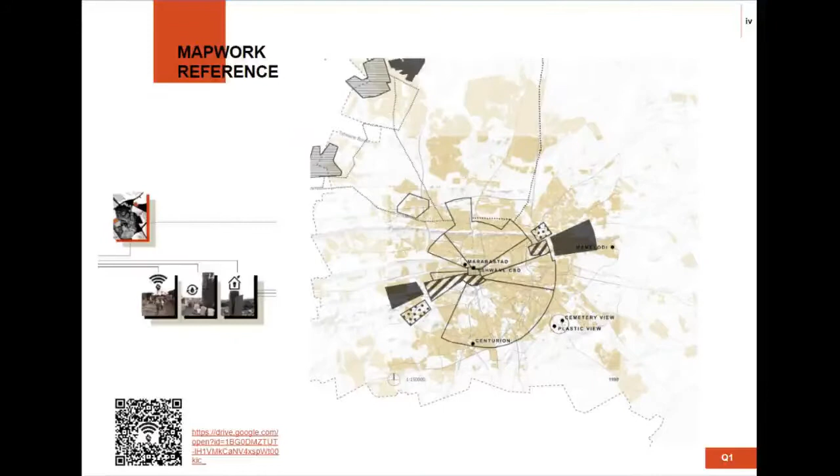Herewith a few slides to refresh your memory on the references to Q1 research, as well as the larger group structure and smaller group splits that took place over time. As indicated, Martine and myself continued to work together throughout the entirety of this project.

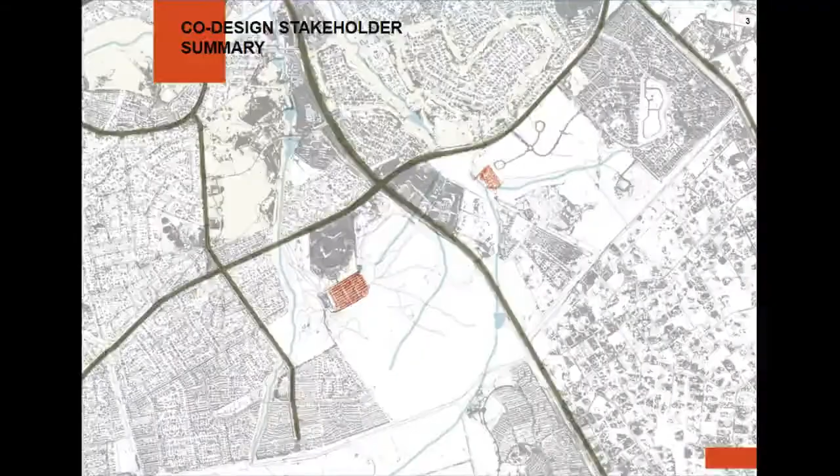The ethos of the Urban Citizen Studio follows the notion of socially engaged architecture regarding methods of design generation that uphold the partnership between architect expert and user expert. Communities are to be placed at the forefront of a co-design process in order to critically engage in socio-spatial architectural design. Here were the various stakeholders that were established in the co-design process, with special mention of our primary stakeholders.

in red, due to their involvement and relation to our group's research direction. Please familiarize yourself with the referencing style outlined in this slide, as we will reference the inputs from stakeholders in this way.

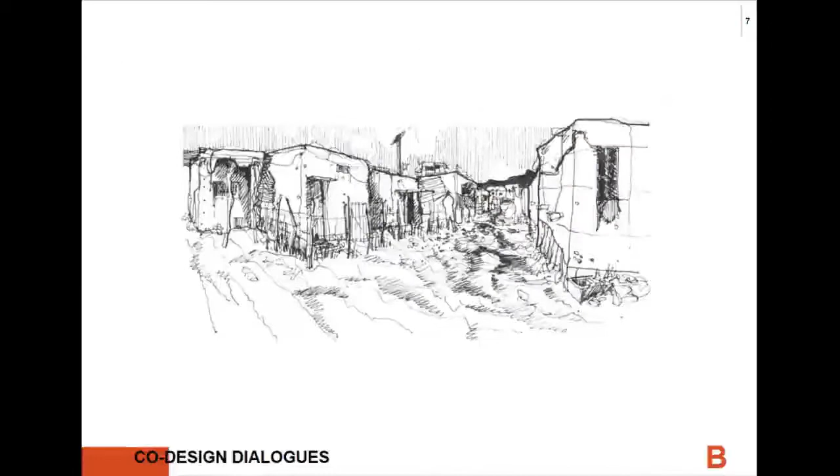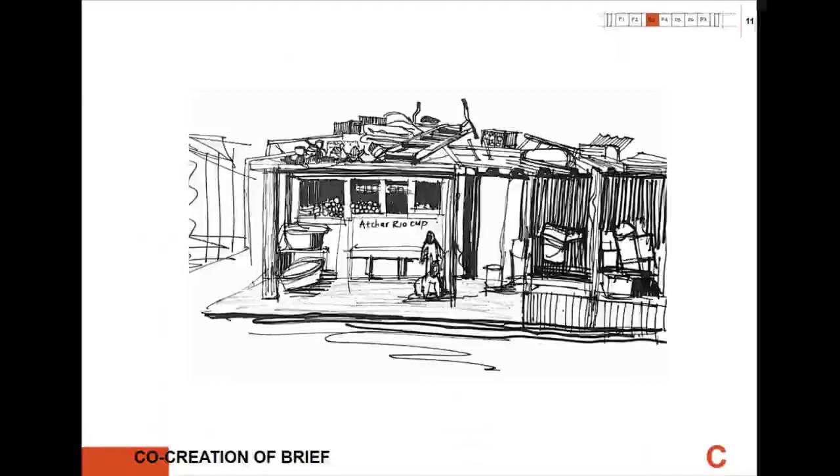To analyze or read architecture through the lens and belief of a sole author imposes preconceived limits on the agency of interventions and the contributions of numerous actors in the process of spatial production. As stated before, the theory of co-authorship was applied at the inception of the project by involving stakeholders into the co-design of the brief. Key principles were then confirmed by stakeholders and noted in red.

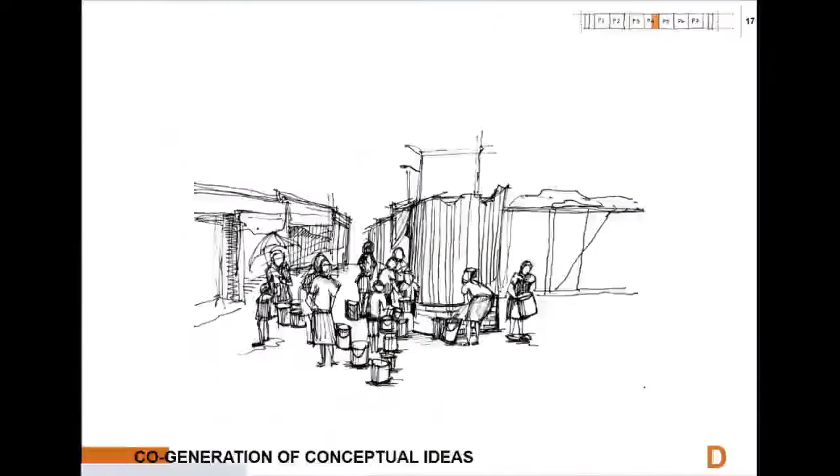Week 4 and 5 hosted multiple stakeholder engagements around the initial co-generation and co-evaluation of conceptual ideas. Multiple inputs and discussions over these 2 weeks accumulated into a design approach that considers community and people as the primary source of energy, and perhaps force for change in these settlements.

The initial design concepts considered by us in the early stages both revealed an underlying inclination towards networks and intangible assets. In order to conduct effective stakeholder engagements, we joined forces and trusted the co-design process to guide us further.

The notion of people as assets are highlighted in the following 3 theoretical considerations: the well-being economy, social capital, and spatial agency. Investing in social capital and working towards the recognition of the informal sector has the potential to steer these communities to greater well-being and self-sufficiency.

An emphasis is placed on the idea of uniting people with various knowledge and skill sets in order to thrive beyond the limitations of their urban location and the strict vertical economy, as stressed by Prof. Ferramonti.

Jeremy Till and Nishat Awan suggest that to design spatially means to encompass the wider sense of space: physical, social, metaphorical, and phenomenological aspects, and by this regard, one could even include non-spatial space. By using platforms of community engagement, the concept remained fluid enough to consider and absorb possibilities of non-spatial operations.

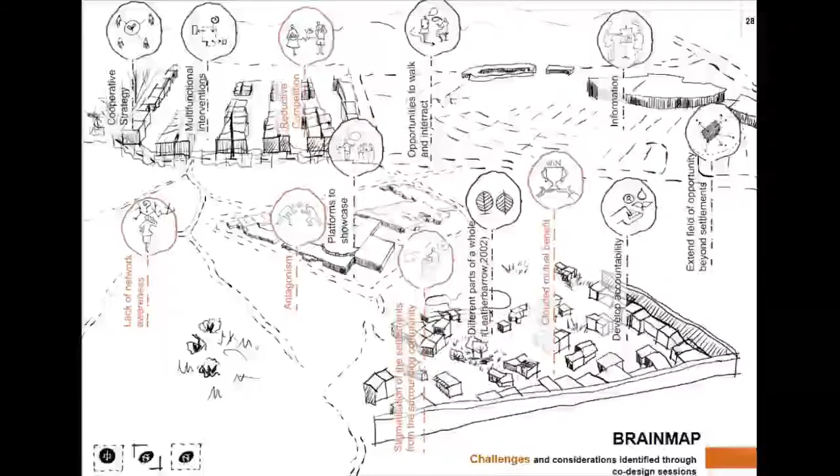Before developing ways of fostering engagement or conversation, it required us to understand the current challenges within the Moreleta Park neighborhood with references to social capital. Additionally, the highlighted challenges from stakeholders were considered.

At this point, it became relevant to find a way to render the concept of social capital interventions applicable and more tangible to the context of Plastic View. Guided by the proposal of Dragos Daskalou, we developed an intervention strategy that would manage a sensitive and effective approach in our architectural design.

Presented here is our 4-step strategy set out to build social capital and foster trust and cooperation: building reputation, intervening in the everyday, small incremental efforts, and future prospect space. This will be explained further in the slides to follow.

Building reputation entails the transformation of perspectives, how the village residents view themselves and how others come to view them. It addresses the idea that to foster trust and integration in the neighborhood, the stigma around the informal settlements needs to change. Human voices and stories from the people of the settlement are important to share and are envisioned to take form in a campaign of some sort.

Intervening in the everyday, being perceptive of the places that people already occupy and use, can help foster buy-in and cooperation from a community. With stakeholders' input, we identified a few potential areas in the vicinity of Plastic View to serve as emergent places for engagement or meeting.

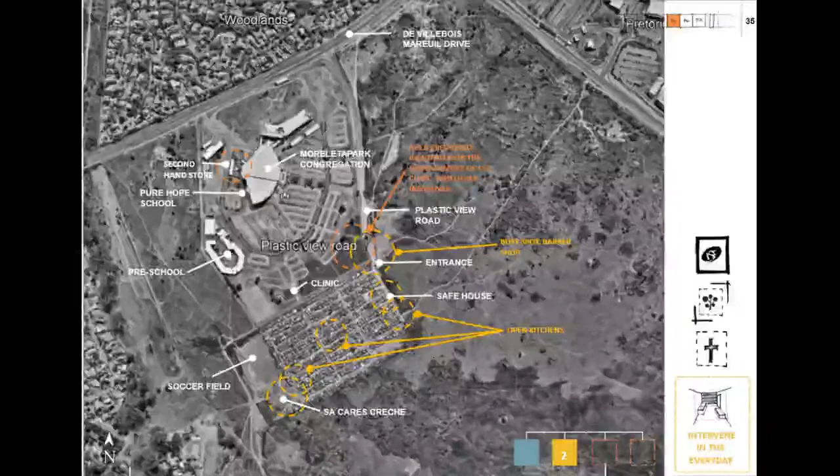The entrance area, SPAZA shops, and other areas identified were then further analyzed in terms of their activities, deducing ways in which community members interact and gather.

Small incremental efforts are interventions that in simple ways start to build self-determination and reduce the social distance between networks and individuals. Incremental efforts provide interim rewards and accomplishment for users in small moments of skills gained, exposure, union, or emotional well-being.

Precedent studies derived from earlier engagements and desktop studies were discussed with stakeholders and internalized with key principles informing our direction set out below. The experimental value of these precedents were considered pivotal in the way they prepare communities for greater goals.

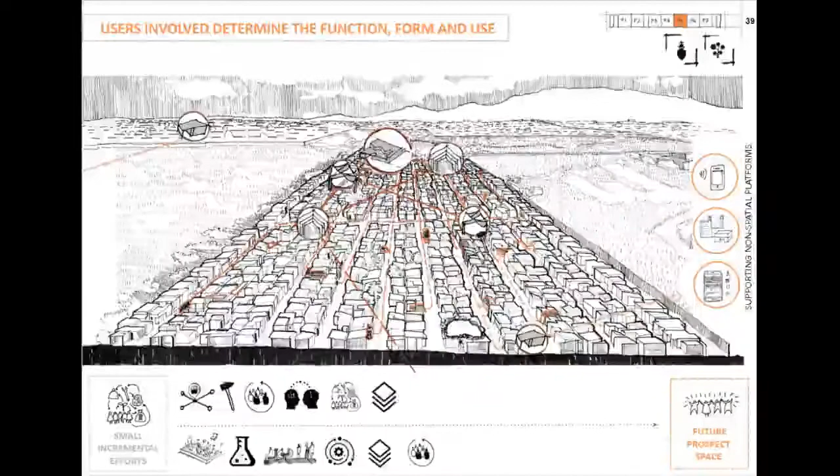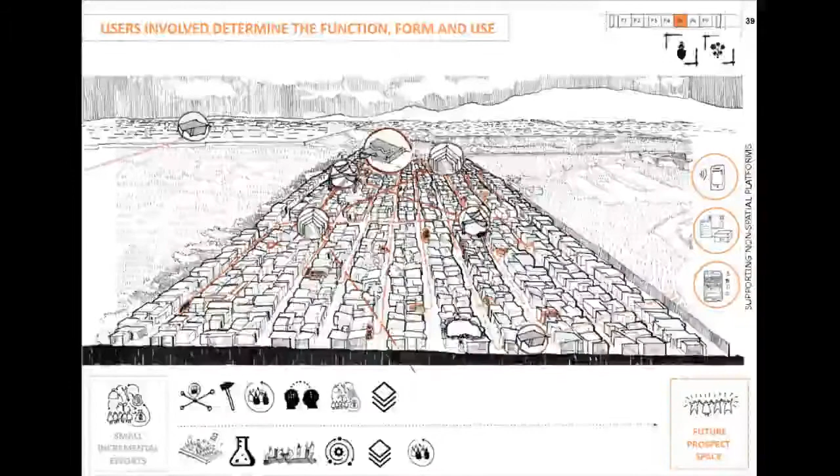Many of the analyzed precedents revealed progression into architectonic spaces or bigger projects over time. Similarly, the future prospect space refers to what the incremental efforts can become. Physical and non-physical small incremental efforts stimulate the multifunctionality of a building or space by bringing several ideas, individuals, activities into a coexistence.

Users are tasked to negotiate and reach an understanding based on trust, resulting in a bonded group of people that can pioneer and grow a project in complexity.

The involved users will end up determining the ultimate function, form, or use of their communal future prospect space, as well as the development, if needed, of supporting communication and electronic resources or platforms.

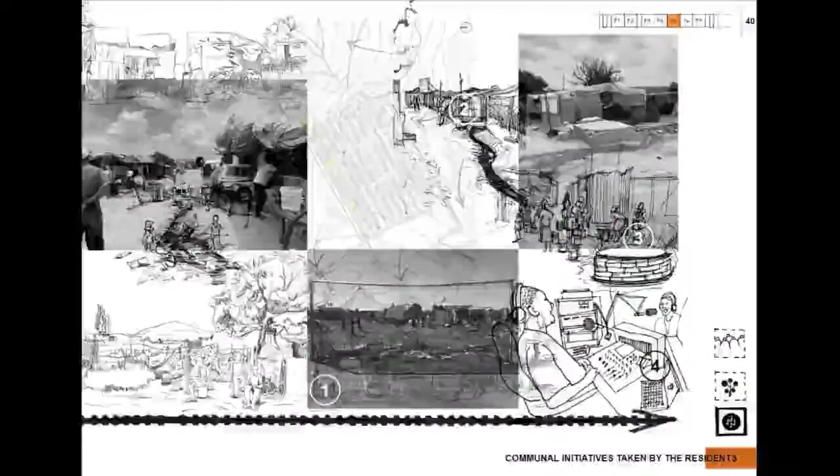This type of coming together for mutual gain has been previously exemplified in Plastic View. As a community, they independently funded and constructed water stands and two long drainage channels in the settlement.

The men frequently organized soccer league matches, and recently, during the pandemic, the settlement raised money to support a local radio station as thanks for the station's continual concern for the villagers.

With the basic framework set out, we furthered our investigation into the step of small incremental efforts, asking how small interventions can have agency in mobilizing self-determination, fostering community connections, and providing beneficial opportunities and advances in this context.

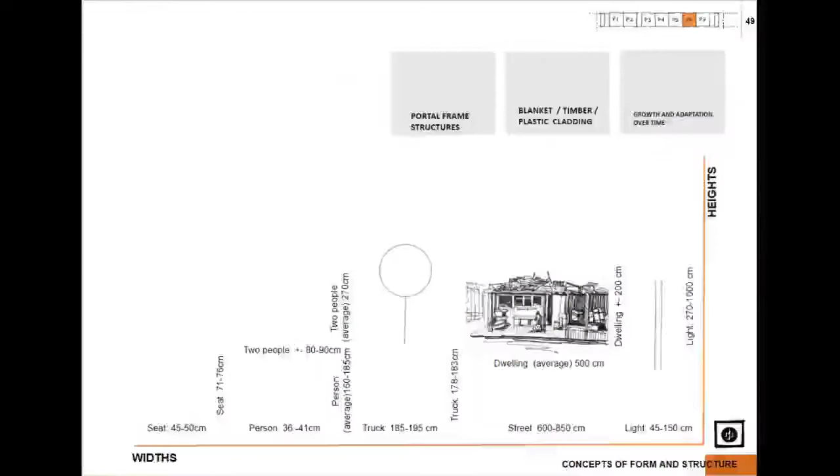An understanding of the form and structures realized within the settlement informed ideas of movability, placement, and modularity of our interventions. These considerations were further substantiated by ideas of the circular economy.

Building on the precedents and these site findings, we propose that an incremental intervention can be as simple as a chair or a table or a piece of fabric hooked onto wire.

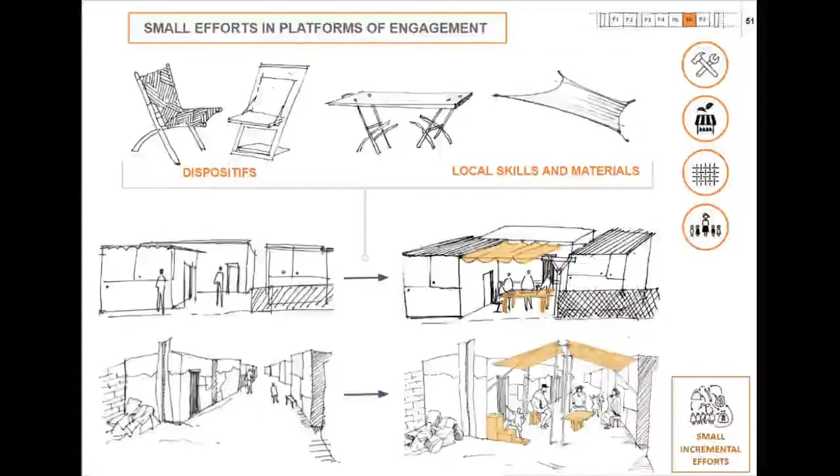Made with local expressions of skills and materials, these objects are able to transform and articulate everyday spaces into places of engagement, prompting spatial and social reactions and facilitating exchange and the building of networks.

Herewith, a few conceptual explorations conducted into how locally crafted dispositives can transform the everyday and foster community engagement in Plastic View.

Discussions in week 7 led to the renewed review of the SPAZA shop network and educational initiatives in the settlements as they pertain to our ongoing investigation.

We came to test the relevance of architecture as dispositive with graphical activities and questions completed by stakeholders and 2 residents of the settlements through a workshop by proxy arrangement.

The activities allowed for the community itself to surface the most applicable dispositives and indicate the preferred atmospheres for places of everyday engagement. The concluding statements were considered towards the final outcomes.

To test our assumption on this dispositive, a final stakeholder engagement led to a small-scale scenario on Wednesday from 12 to 5 when chairs were randomly placed in front of a SPAZA shop.

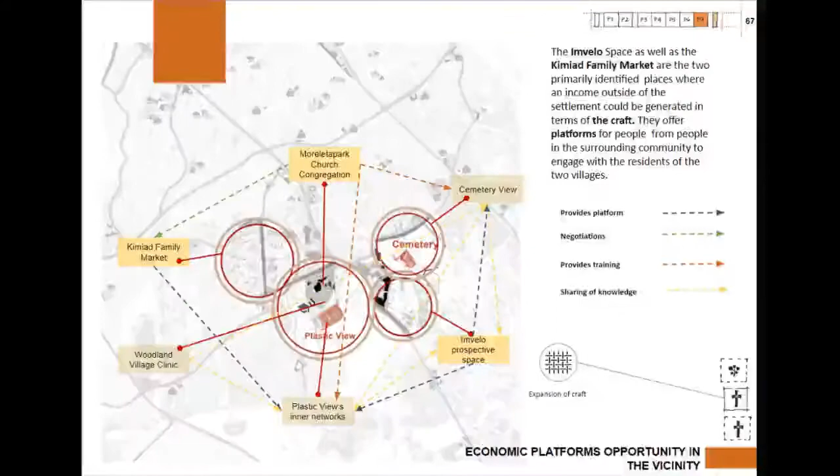Synthesizing the information and exploration to this point led to the emergence of two proposals as focus areas for incremental efforts and places of engagement, namely the decision-making space and the SPAZA workshop.

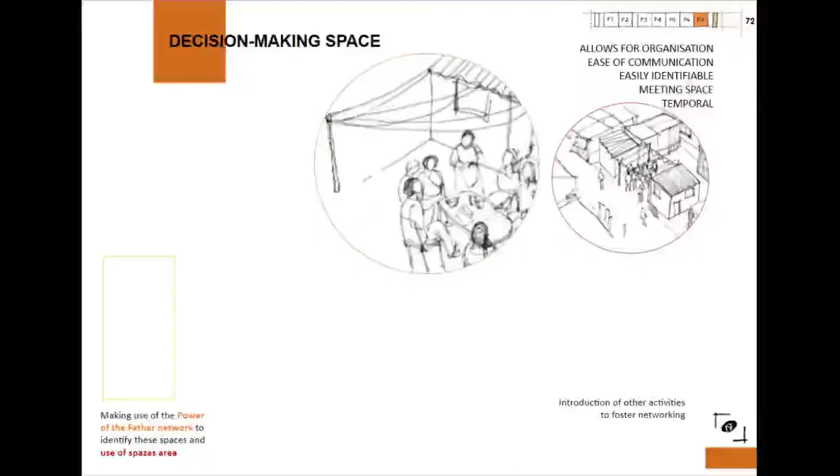The decision-making space surfaced from the idea of articulating areas to provide more platforms for fellowship, education, or rest in the settlement. It is an everyday space that, with the presence of dispositives, table or canopy, allows people to gather and start to converse.

Deceivingly unremarkable, these spaces can in fact instigate and facilitate important decision-making or networking between different individuals in the settlement. As an initial suggestion, these spaces can be linked in proximity to the residence of members of the Power of the Father structure or SPAZA shops.

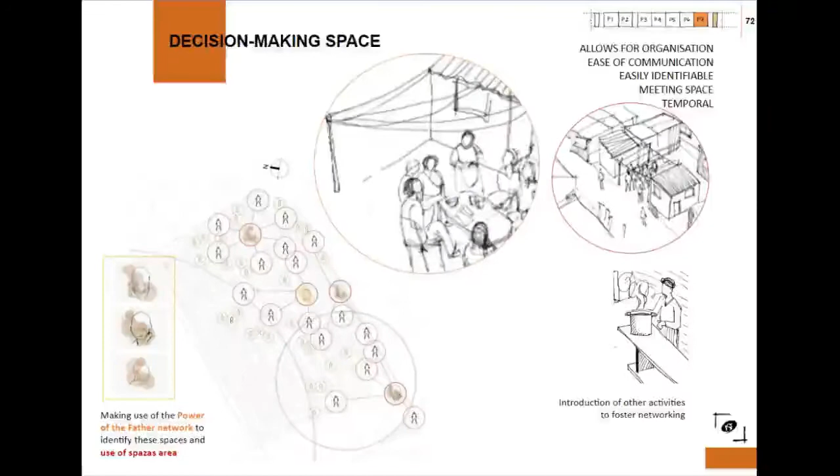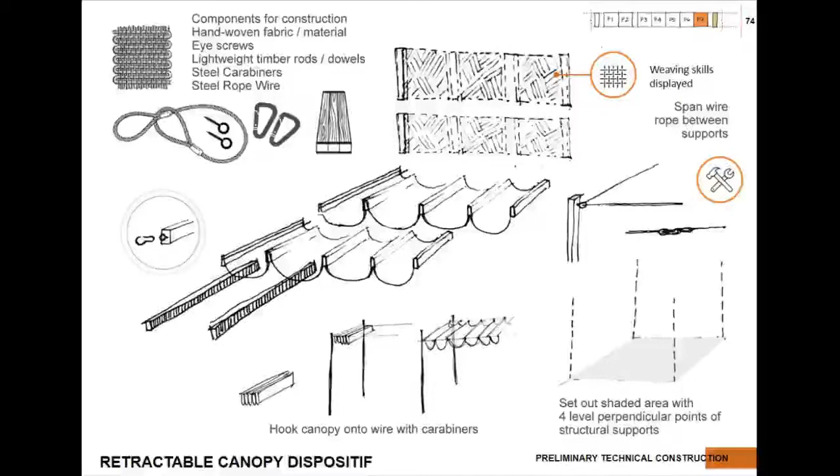The canopy's role as a shading device and a location indicator makes it highly useful for makeshift gatherings and workable spaces. The following preliminary technical construction engages with the local skills, crafts networks, and low-cost fixings known to the community. The idea is for the design of these elements to be adapted by crafters and users as sees fit.

The SPAZA workshop as our second proposal presents further opportunities for network awareness and mutual benefits realization. The activities of two networks, SPAZA shops and weaving ladies, along with an educational pseudocurrency system for children, as investigated by a fellow Group B member, could achieve a small circular economic loop of various benefits.

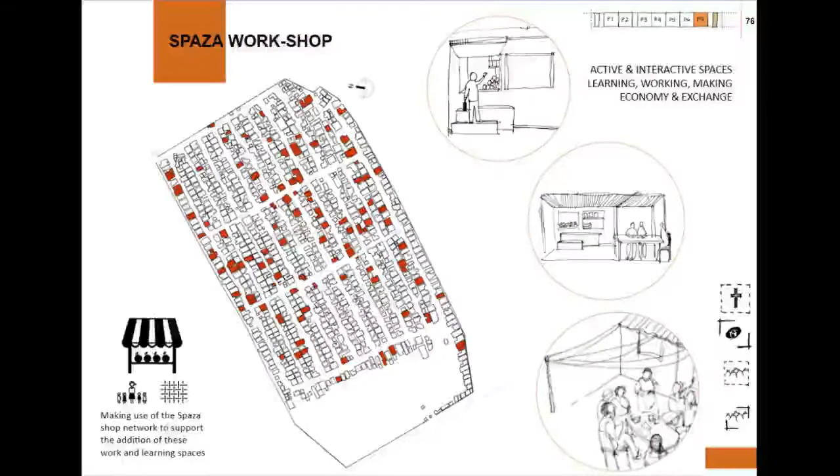Other networks can start to collaborate with them too, such as Invelo. SPAZA shops already are sources of attraction to adults and children, but it could have the potential to become combined learning, working, eating, buying, and socializing spaces.

This is especially informed through scenarios as seen in page 78, where devices used for work can double as play elements. For these several proposed activities to coexist, users must start to negotiate and come to an understanding based on trust and cooperation within a shared space.

This multifunctionality could then be reflected into a bigger space or more instances if needed.

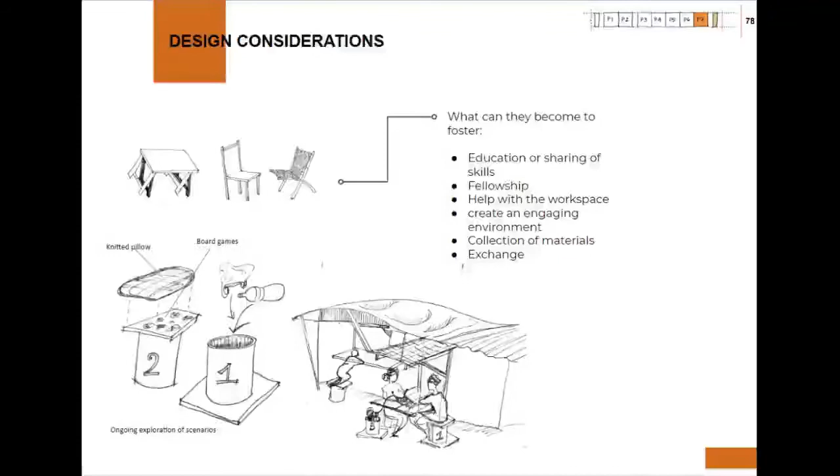According to Lee, creative design thinking is achieved by facilitating the mixing of the abstract, such as networks from an architect's perspective, and the concrete realms, such as the everyday spaces and dispositif.

Furthermore, incorporating the notion of knowledge sharing, which entails that spatial agents should understand knowledge as space production, thus also suggesting epistemic emergence, where space in all its forms should benefit from the realm of users' input.

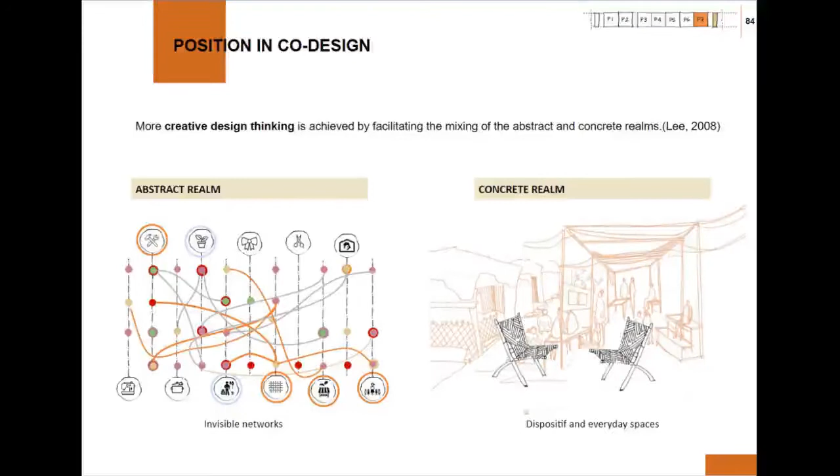In our deliverable, emergence is ensured through the versatility of the strategy and the potential options that could surface from it, ultimately allowing the residents to choose the best options and create something greater.

Still somewhat entangled between the strategic, intangible, and physical accounts of our project proposal, the work of Cora as a precedent was considered to navigate our agglomerate contribution to spatial agency and the architectural discourse.

Our final deliverable is hence conceived as both a toolkit and resource for the realization of spatial agency within the community of Plastic View and beyond.

The combination of strategy, coordination of networks, processes, common objects, and spatial suggestions are packaged to activate community engagement, through interaction and sharing of ideas, and also engagement through the collaborative shaping of users' own environments.

Design developments undertaken by research and partners for the past 8 weeks are to form the basis of this toolkit upon which new information and input can be added.

The cards themselves are in this way also dispositifs or instruments for conversation, collaboration, and the trial and development of smaller to bigger scale interventions.

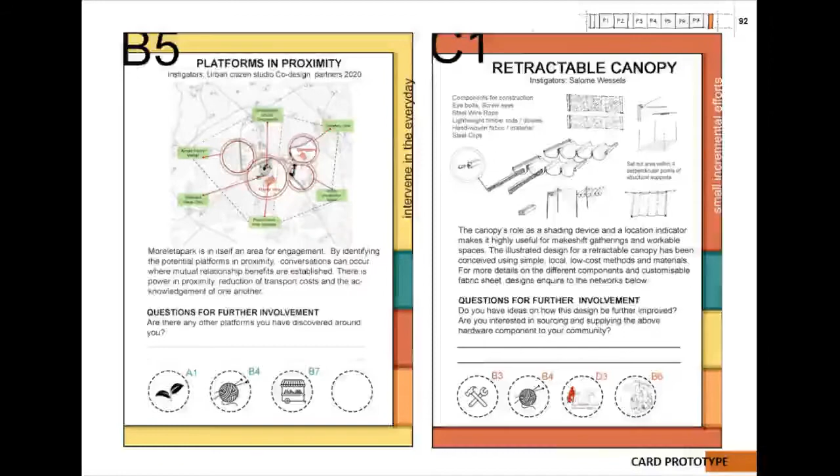It is up to the community to take control and head into the direction best suited for their own situation, aiding in community ownership.

The following is a representation of how all the parts of the toolkit work in unison.

And as one last thought, going forward, what if we tried just to see? Thank you.